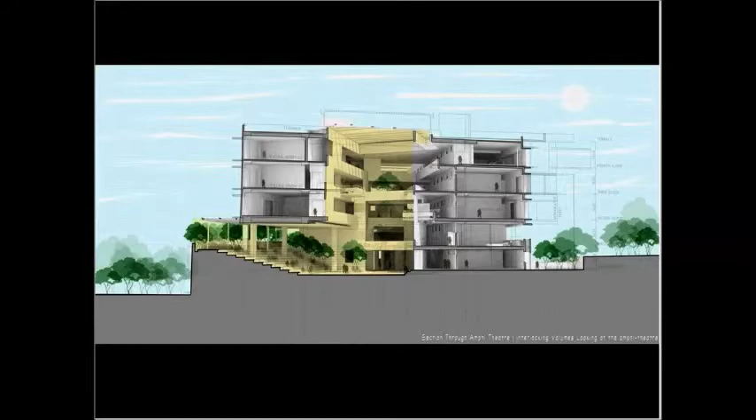You start studying sections, and irrespective of the number of floors or the depth of the building, you work out sections in such a way that you bring in the kind of light you're looking for. As long as there's natural light available outside, you should try your best as an architect to make sure you don't have to switch on lights as much as possible. That's why you keep working out these sections, opening it out, creating wind tunnels, trying all kinds of tricks. And that's great fun - that's what's fun about doing architecture.

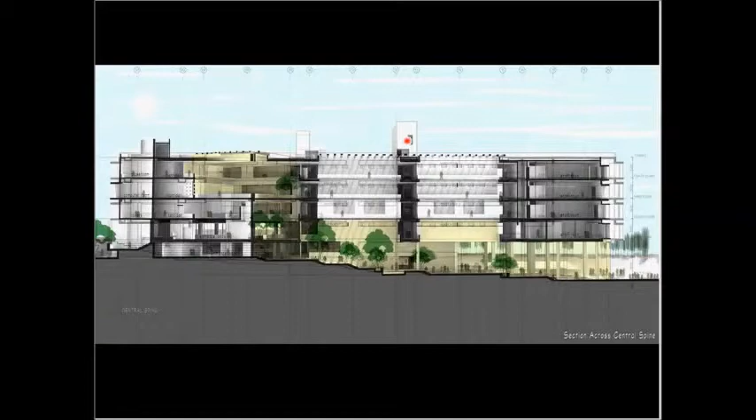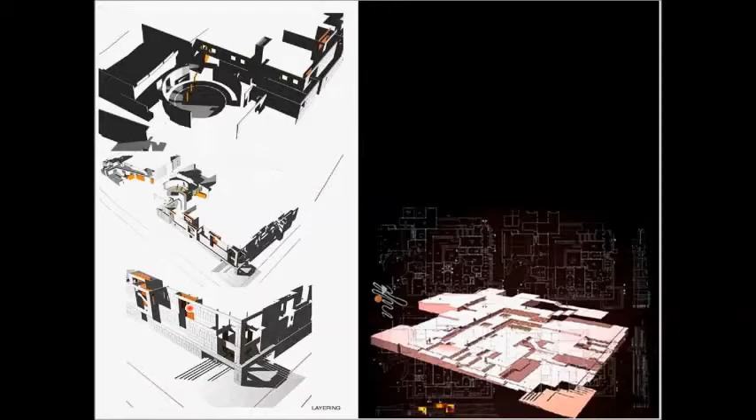This is one example, NIFT Hyderabad, where we had to deal with the southwest radiation of Hyderabad's heat. We worked with blank walls towards the southwest and tried to bring in reflected light, and again air, through these gaps. This is the western side - it's absolutely blank as you see it, but there are gaps kept in between allowing reflected light to come in.

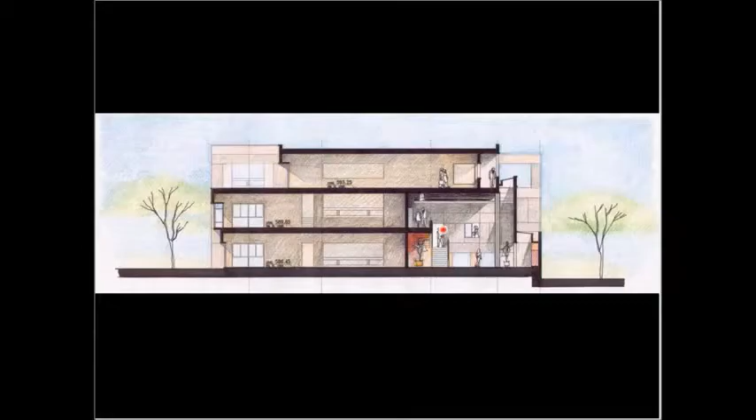Between these gaps there are skylights placed at different levels. When you look at the section, this is the western wall, and we're trying to bring light through this into the main circulation space. That's how you tackle the western side - you bring light from the top, illuminate the space, and try to create the kind of desired ambience within it. You get pockets of focused light, and relatively lesser light onto the wall.

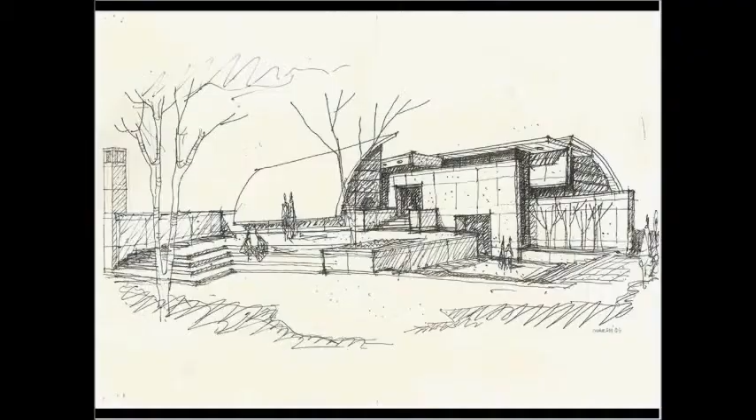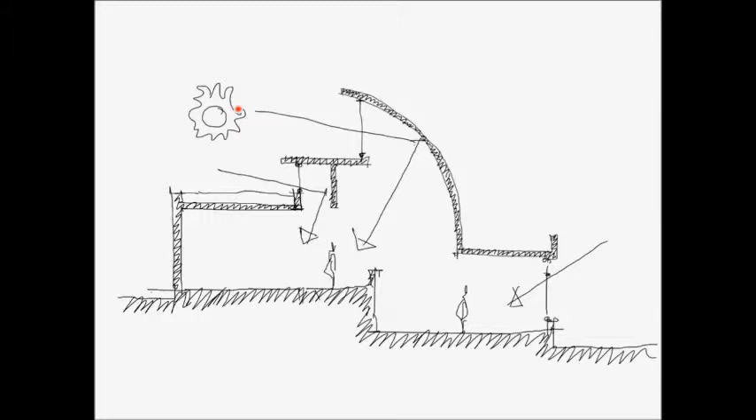This is one more library where we again had to face this - this is the western side. I'll show the section where the western sun was brought in through the skylight, and the reflected light comes into the library space below. So instead of bringing direct sun into the space, you try to deflect the light and bring in indirect light. Thus the heat doesn't come in, but the light does.

So it's not only about sustainability - light is mathematics also. You have these solar clocks where you can do certain things with absolutely mathematical precision. One example is the Abu Simbel temple, which was getting submerged when the Aswan Dam was being constructed. This was one of those UNESCO projects where every stone was accounted for, and the entire huge temple was shifted above and kept above the flood level.

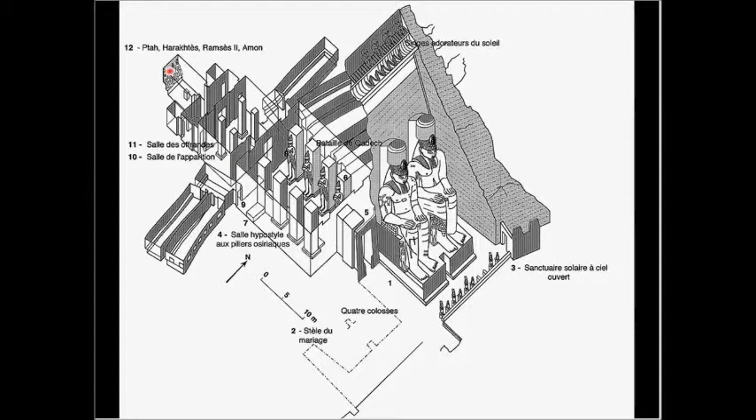What happens is, on a particular day of the year, light enters right into the sanctum sanctorum at the end of this entire rock-cut cave, and illuminates the figure at the back, which is supposed to mark the birth date of the Pharaoh, the king.

When this temple was shifted, one of the conditions was that on the same day, the light has to enter the inner cell, so they oriented it exactly the same way. One of my friends had worked on this project, and when that light came in, there was a huge celebration and they had a party.

But it's mathematics. You just have to orient it exactly the same way and you will get it. We were trying to do this in one of the temples, a Sai Baba temple in Bangalore. On a particular day, we wanted to bring in light which would fall onto the idol, which we worked out entirely, but it really didn't happen.

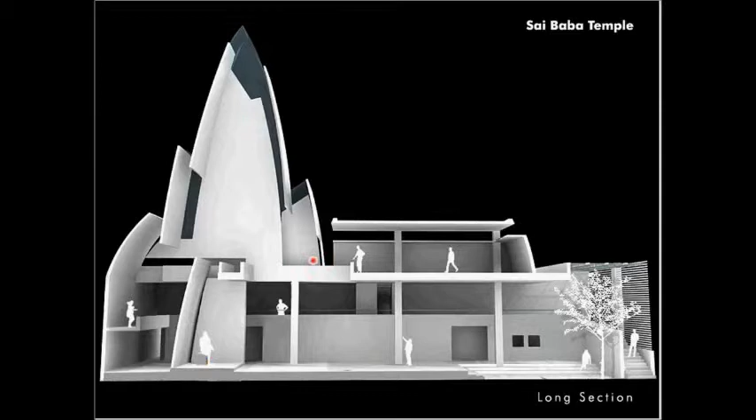What I'm trying to say is it's very easy to do, and now with all the software it has become even easier. So if you see this temple, as against the traditional Shikhara, we were trying to bring in light through this volume. These are some images of how the light comes into the space below.

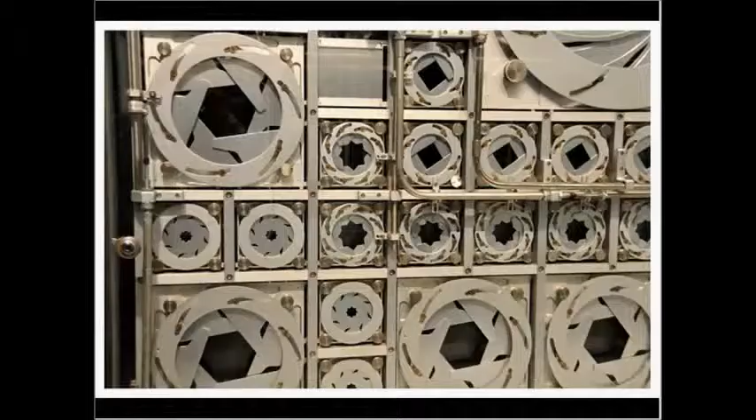So we are now getting exposed to more and more intelligent skins, and as time progresses, controlling light through natural devices will become easier through these different intelligent skins. But we as architects have to solve the problem through design. One way is to use these technologies to solve it, but if you can solve it through design, I think that's probably the right approach. The second layer would happen using technology, which does need more money. It involves cost, but whenever you solve a problem through common sense, it doesn't need cost.

This is one of the houses we've done in Bangalore, and this is again about using a device to control light. The entire roof has operable louvers, and each panel can be operated independent of each other, or synchronized. It's almost like a magic cube, where you can play with the light.

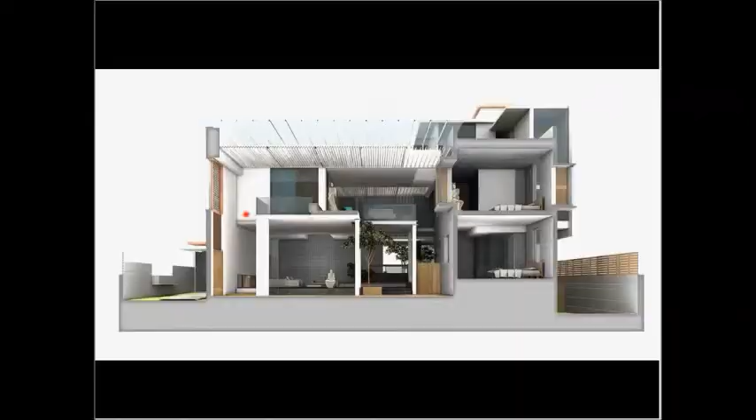Whenever you want, you bring in more light; whenever you want, you bring in lesser light, and there's this space within that. I call it a room-within-room kind of space. So you have these operable louvers - that's how it looks from outside. But when you come in, you have the entire celebration of light happening.

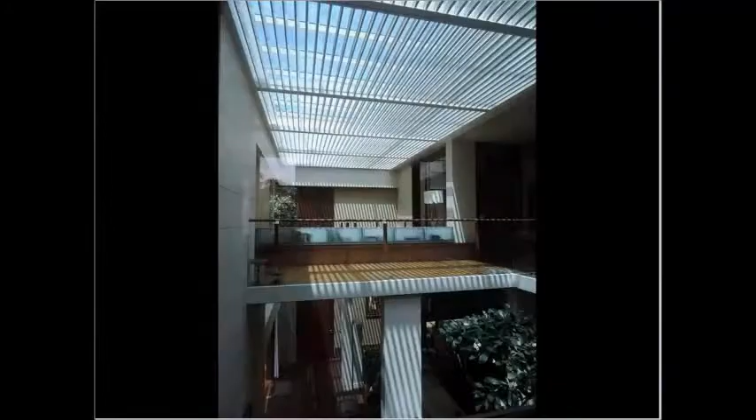What I like about it is you can change these moods whenever you want - open it and close it. When this change happens, when you play with the remote control and it changes, it's like fun. You almost feel like a kid handling that light. So this whole space keeps changing, and as you see, you can totally black it off, making it even a completely dark space if required.

Traditionally, we have been masters in handling light through jalis, through these screens, and some of the best examples of this modulation of light are South Indian temples, where you go in layer by layer, from one layer to another, to a third layer, till you reach the Garbhagriha, which is actually the smallest and darkest place. This transition happens in a quite amazing way.

You sort of go from out to in, layer by layer. First you remove your shoes, you touch the floor, sensitize your skin. You go and ring the bells, sensitize your ears. You light a lamp, sensitize your eyes. You have Tirtha Prasad, sensitize your tongue. So all your senses get sensitized as you move from one layer to another.

In the process, the light quality changes, the volume changes, the darkness changes. As the volume becomes denser, the temperature also comes down, the smell changes, the sound changes. Outside you have noisy dust and noise; here it becomes quieter and quieter. You start smelling flowers, and eventually it ends into one dark space, which is a symbol of infinity again.

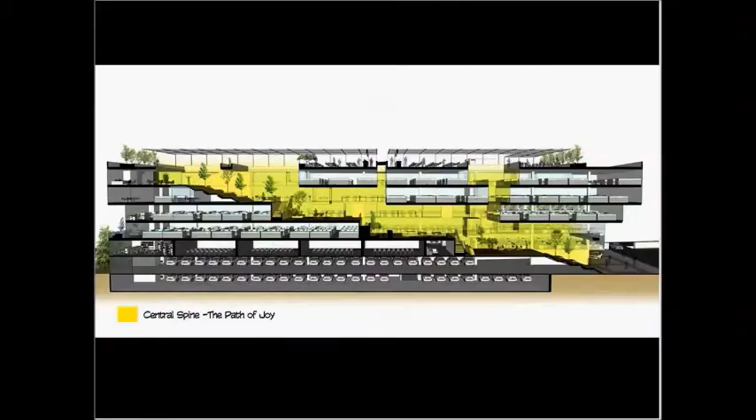So all these great architects have used light to great effect. And then there's framing the light, which is again a great idea. I always get fascinated by this idea of framing the light, which we have tried to do in this building, in this section. As you come in, you go across and you see the light at the end of this entire stretch. Framing the light is an old idea.

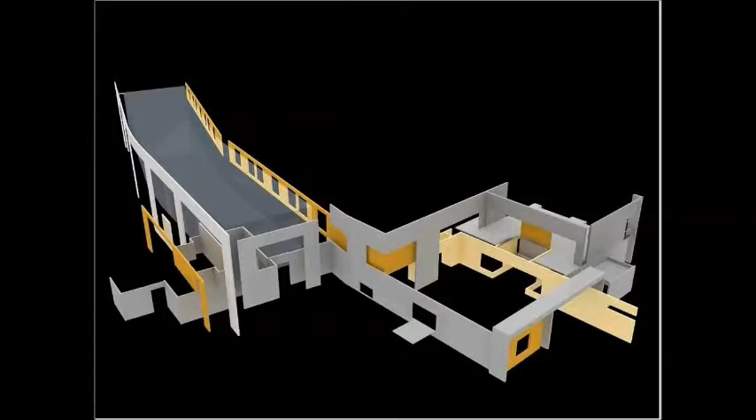In this project, we tried to exploit that idea of framing and take it to the next level, where you come in here through this frame, you see the entire spine, but you can't enter from here. You have to go across and enter from the other place.

Now, looking at studying this sequence of light and shade, this is something which for many years we have been trying to understand—that entire sequence. How do you bring light in? How do you create darkness? And again, you create the sequence of that.

One of the projects, very early during IISc, I had gone to the site when construction was going on, and the shuttering was all in place except one last row. The light was coming through the shuttering, which looked extremely beautiful. In those days there wasn't so much pressure of completing buildings like we have now, the time constraint. So I went back and fought with structural designers to give us that skylight, and it happened, and it made a huge difference. Then we started doing it intentionally.

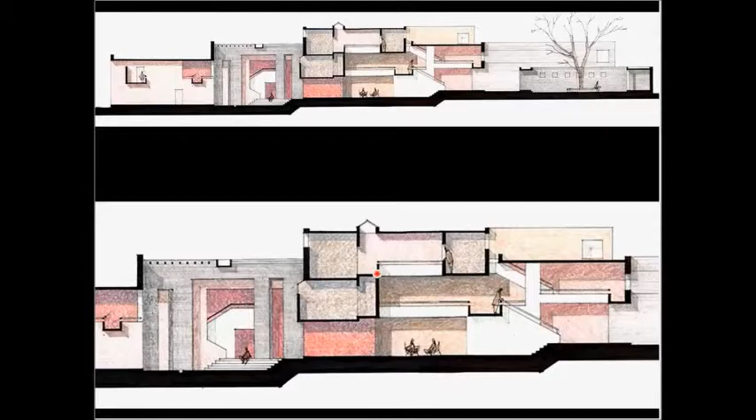So in this building, as you see, you have this wall and you get this light. And then in this section, you allow the light to fall here, but you create darkness here, making sure the light doesn't fall onto this space. So in the process, you are creating light, creating darkness, creating light, creating darkness, creating light. There is a play of volume, there is a play of light intensity.

And once you understand it, in the next project, you try to do it intentionally, and you keep devising these, which all of us learn over the years how to handle it.

I was listening to one of the talks by Rajneesh, and this was about Buddha. He was using words like a godly man who was an atheist, and he was talking about presence of absence, those kind of contrasting words. And I thought, how do you really create that? I'm just wondering, how do you really replicate that in architectural space?

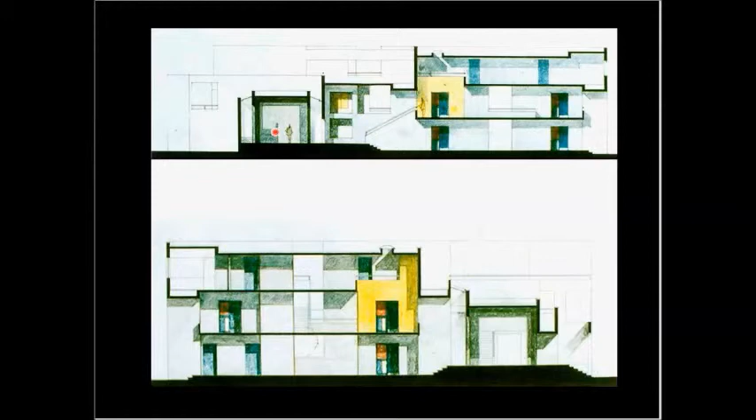And this is from this black cube we are looking at the other one. So you create that kind of tension - that creative tension within the space. This is the same thing again from the yellow cube, we are looking at the black across.

There's something about moving lights and moving shadows, and this is something again which fascinates me - that silhouettes, the transparencies, translucencies, the puppet shows, which is again a very famous thing in the Far East.

Now I was watching one of the movies - this was in mid 80s, Ketan Mehta's film called Mirch Masala, I think. In that, this is the first time I could realize the importance of controlling light. This is where - this is not the same image from that - but there was one big gate, and within that there was one more gate. Within that there was one more gate, and this morning sun, and this Om Puri comes in.

He opens one smaller gate. The light comes in. Then he comes in, closes that gate. The light stops. Then he opens the bigger gate. Again, light comes in. So it's like releasing light and blocking the light, again releasing it. And you always wonder, can you do it in architectural space? This has some incredible quality of handling natural light, and can you really do it in architectural space?

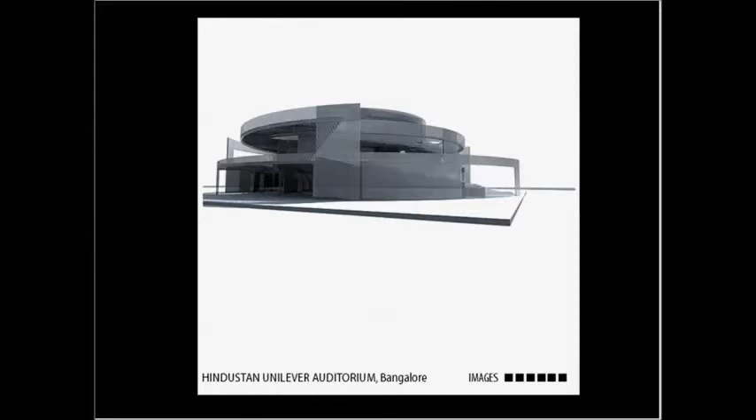And you always keep it at the back of your mind - how do you really try to do it? And then we were doing this Unilever auditorium, and we wanted to feel that moving shadows. As you walk around, you will see those shadows which will keep moving around. You have these shadows as you sort of walk around. There would be a feeling of movement, it's almost like a musical instrument. So that's the space of the auditorium.

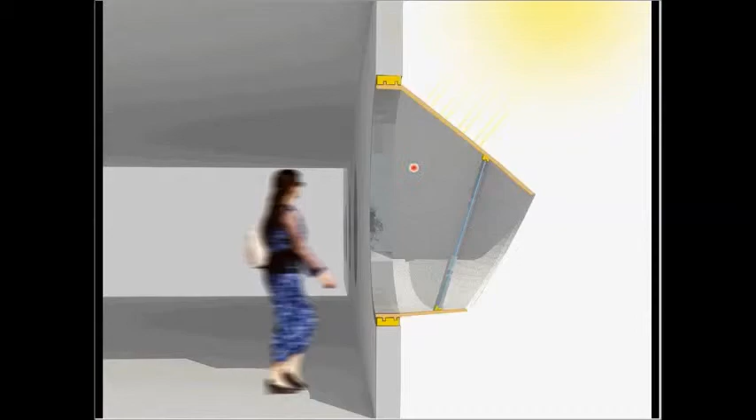In the morning, if you want to get direct morning sunlight, you can do that. If in the evening you want to stop the sunlight from coming in, you can just do it by rotating that. Or you can exploit it in different ways. So it has a quality of movement - so this whole facade could actually change as you sort of rotate it, so it could become a dynamic facade, which could be a very simple solution.

So it's about bringing the light from different heights, different levels. When you have a normal window, which is at your eye level, the kind of light which would come in would be different - the spread will be different. When you bring it from the top, it is different.

When you see it like that coming from the ceiling, it has a totally different quality to it. So you learn to handle light, you learn to position the light, and sort of try to find how it comes in.

We have softwares available now. Earlier we used to do it through calculations, but about this rotunda, across the year or across the day, how the light would change in plan or in actual thing. We try to make studies of that in different projects, and then you actually experience that. You see these layers, and the way the light quality changes there.

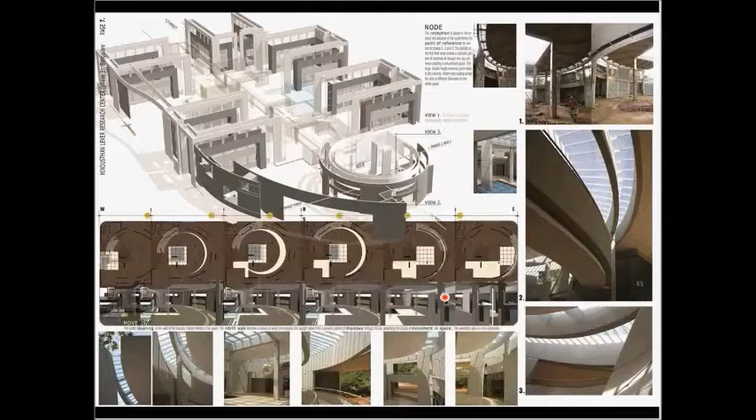And as I said, when you use this and then you actually see that movement of these shadows happening, the space becomes dynamic.

This is one other example where... okay, I will take probably a little more time. So as you come in into this, this is one of the research labs which is in Bangalore called Aurigene Discovery.

So what we did is we created a path of discovery which culminates into this rotunda. As you come in, you keep discovering the space. You don't see what is happening beyond, and then it slowly comes here and it explodes into a larger space, which we wanted to have a wow factor there, kind of.

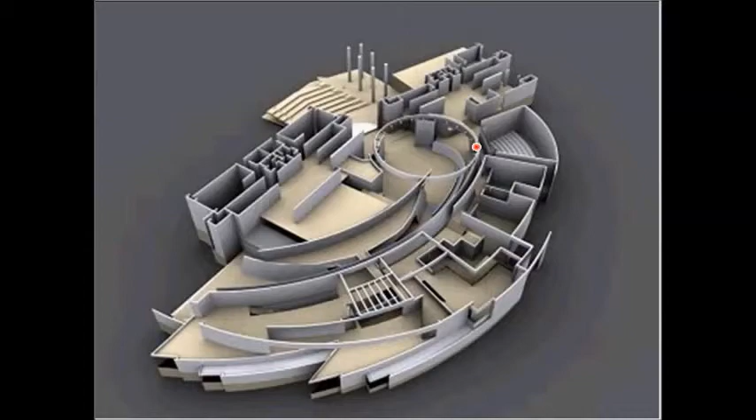So you come in from there, and this is the western side. You come in, you just see one spot of light here, which is a courtyard, and which becomes a focal point. You come further, and again that becomes one focal point. But you always have this different kind of quality of light happening across, and this feeling of light keeps changing throughout the day, and then you come into this larger space, which is actually a learning center.

There is auditorium here, lecture halls, dining, and breakout space in the middle. And that's how the space looks like when you look back, and it has that cutting edge research kind of feel, this place is for R&D lab. So we wanted to make it like a cutting edge research place.

So just to give that carved out space, it feels as if the entire space is carved out of one material, almost like some of these rock cut architecture.

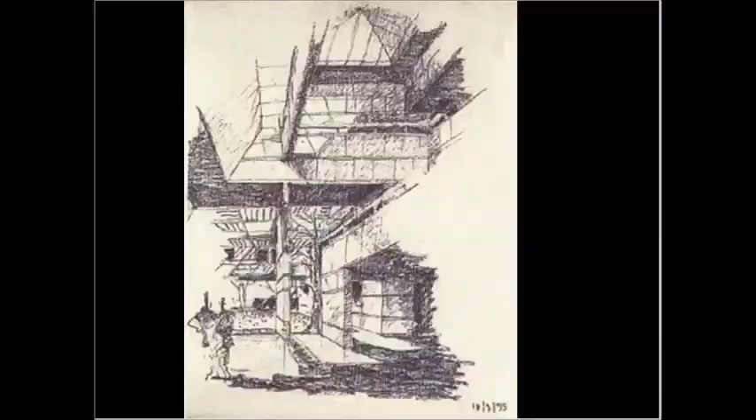We tend to spend a lot of time trying to understand the soffits of the building. So you sort of create a dark spot here, bringing in light. Again, you create what I was explaining earlier, and try to see how light falls onto this, and study these soffits at different levels and the reflected light which falls onto it.

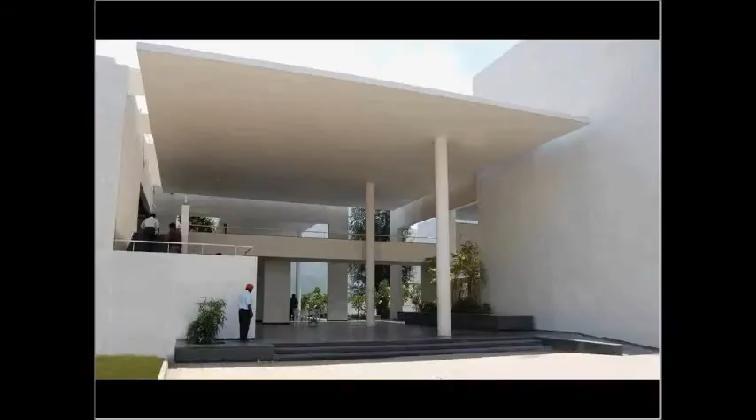We are talking about that reflected light which falls onto these soffits, and we tend to spend a lot of time trying to understand that. Again, the same thing I'm talking about, the flat soffits. We try to fight with all the structure designers to invert the beams and suspend the slabs and things like that, giving us absolutely flat soffits in most of the projects.

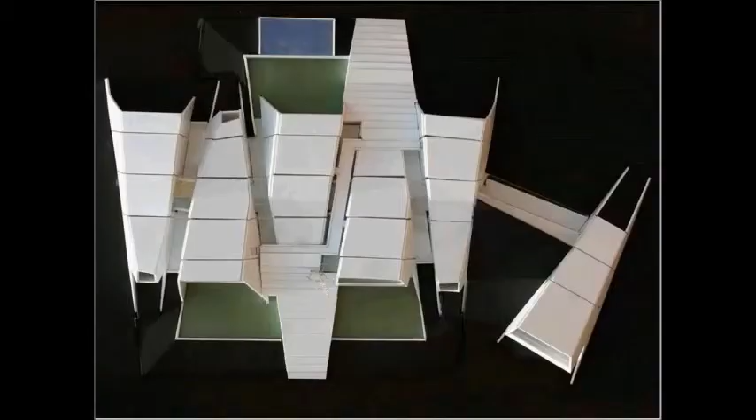And we were trying to do one kindergarten in Trichy, where we tried to use those slits in the space, and that's the model of that. And we wanted the kids to sort of run through that light, because most of these kids, they get amazed by the ray of light which comes in, and they want to catch it.

And here you have this entire sheet of light. So we were imagining kids jumping in and out of that sheet of light, and that would create that extra fun element into this space. So we created these kind of slits within the space.

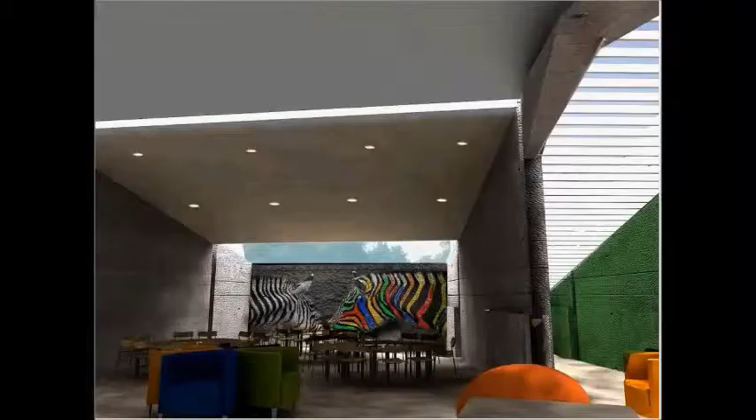So handling this filtered light had been a mastery of all of our ancestors. The best thing about these jalis is that, unlike glass, they breathe. You can have that transparency or translucency, and at the same time you get a breeze coming in as well.

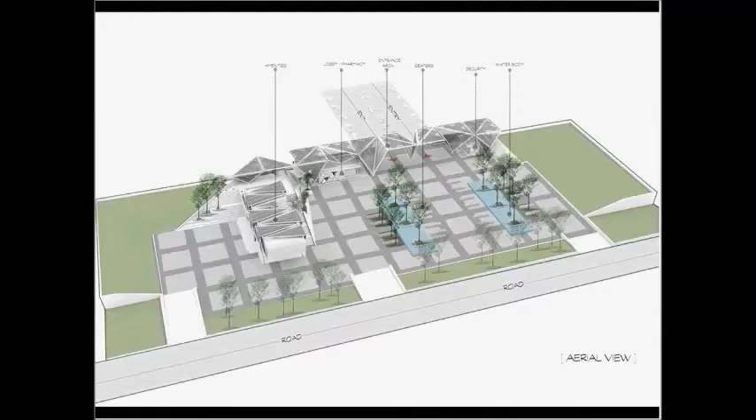But now those things are changing with these perforated panels. This is one project where we used perforated sheets, trying to understand the transparencies and translucencies. You keep making mock-ups to test the dimensions of the perforations, whether it should be 6mm, 8mm, or 10mm, so that through one layer you can see the other layer and get exactly the right kind of translucency.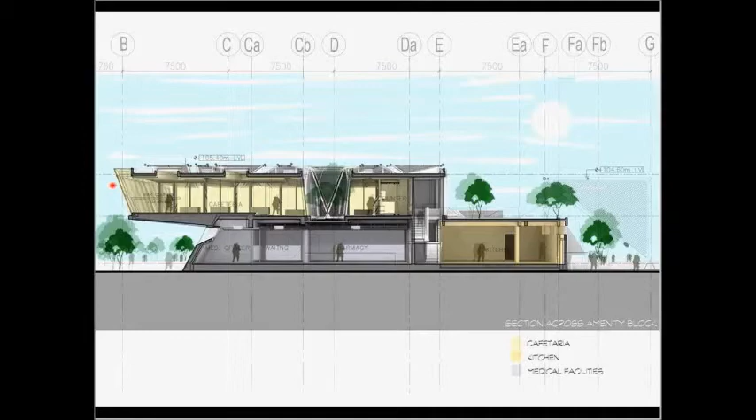This is part of another dining hall and small bank counter, where we were again trying to modulate light through slits and perforated sheets on top. This last one is in IIM Bangalore, where we recently did an extension to this space.

This part is done by Mr. Doshi, and this is probably the most famous pergola colonnade, which every student of architecture knows about. We had to complement this and create a classroom complex across from it.

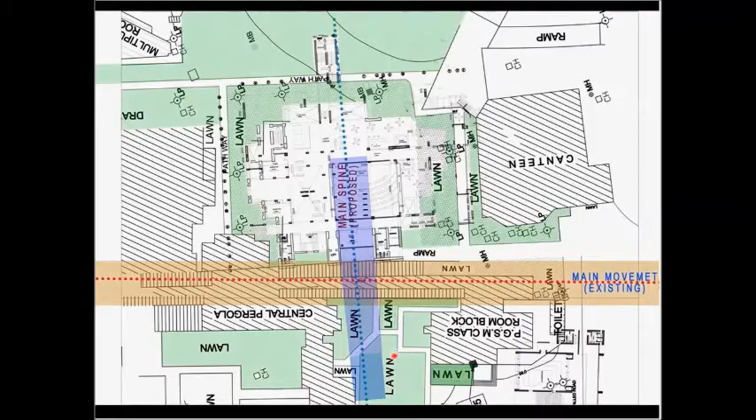So this is the pergola main movement area, and there was a lateral movement in the other direction, the secondary spine. We oriented some of these classrooms—this is the main pergola area, this is the lateral spine, and the classrooms are placed there. There's a large flight of steps going across, culminating in a reading hall at the end as a focal point.

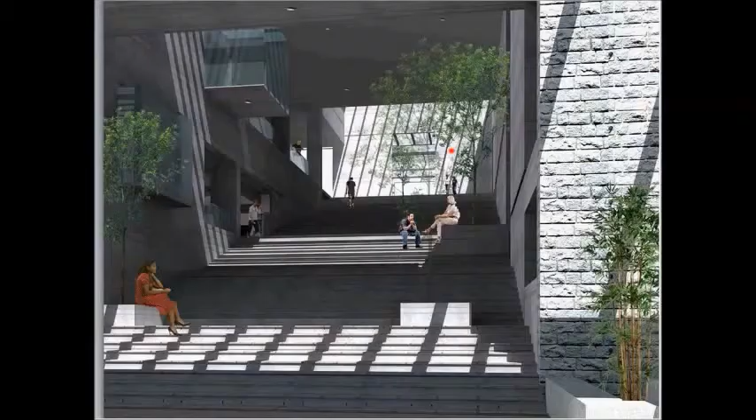When we looked at it, we said the dramatic quality of light in this pergola main spine—we had to complement that. When we started drawing some sketches, we asked, can we have different cubes that bring different light into the space? Some of them became meeting rooms hanging out, and some of the cubes became skylights.

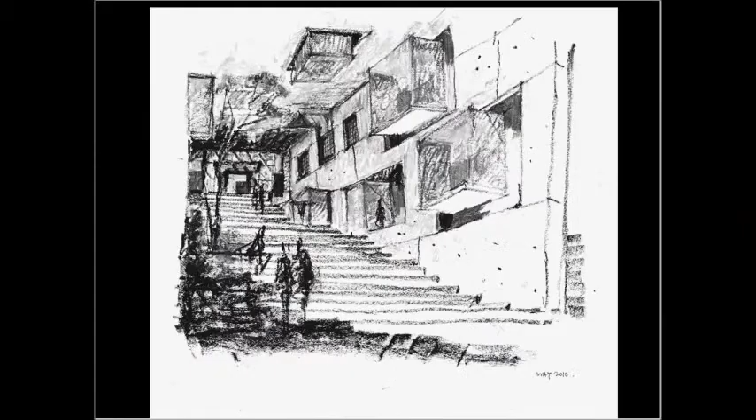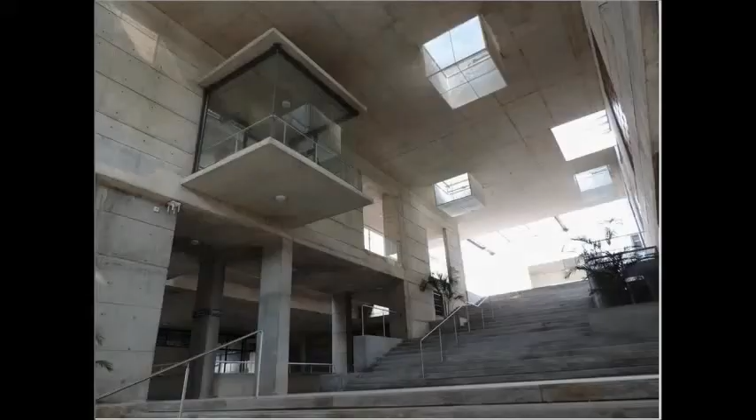So that's the main spine, and this is how the space looks now—you have these meeting rooms, these cubes hanging from the space. This was a western wall, so we wanted filtered western light to come in, and that started happening. If you go there from 3 o'clock onwards, you'll see these dots happening, which is fun.

Then we were trying to control the light within the classrooms, which I'll explain quickly. These are the images, looking back at the western wall, the main pergola.

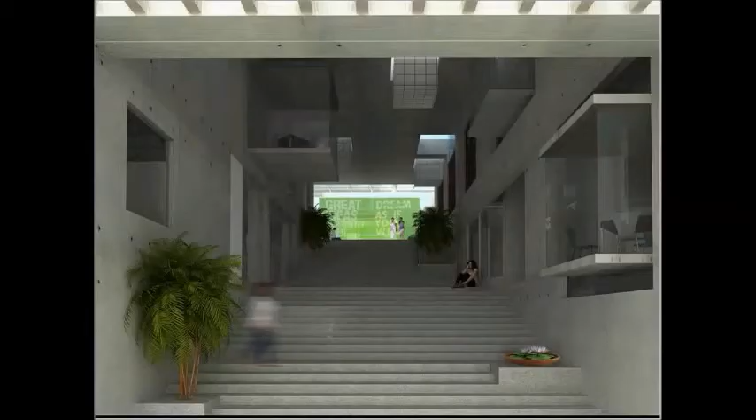When you're talking about a classroom, you want different kinds of lighting requirements—normal lecture, lecture with slides, lecture with AC on or off—so you need different configurations, which we tried to achieve by sliding two sets of perforated hole screens. If you move them by just about 200mm, you can create either total darkness or get filtered light coming in.

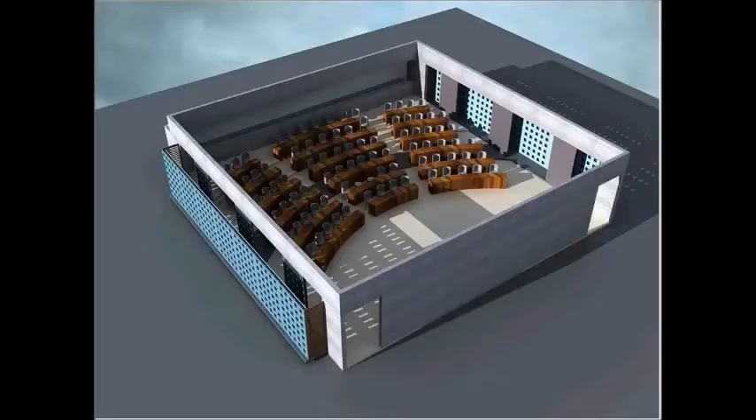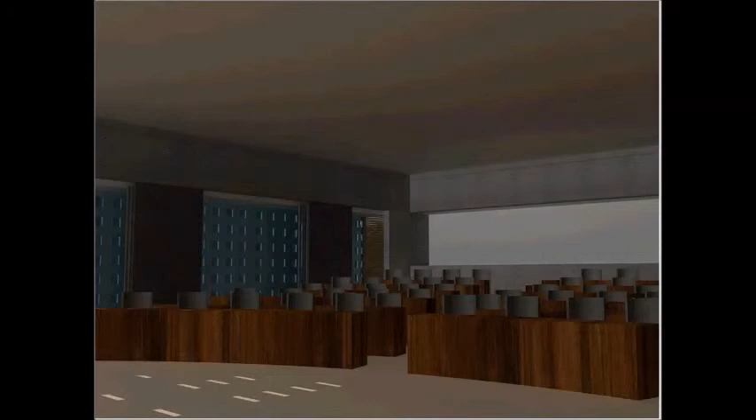So you can either have light or close it off, with a very simple, rugged mechanism. This is how the classroom looks, which can work without AC, with AC, with projection, or without projection. And this is how the screen looks from outside.

So to end the presentation—whether you are doing a house, a research lab, a school, or a temple—you try to work with light, celebrate light, and create different moods. But when you look at the work of masters, whether Doshi or especially Louis Kahn, you always keep them as our idols, and you keep trying over and over again to reach that standard, connecting your space with emotions and celebrating light.